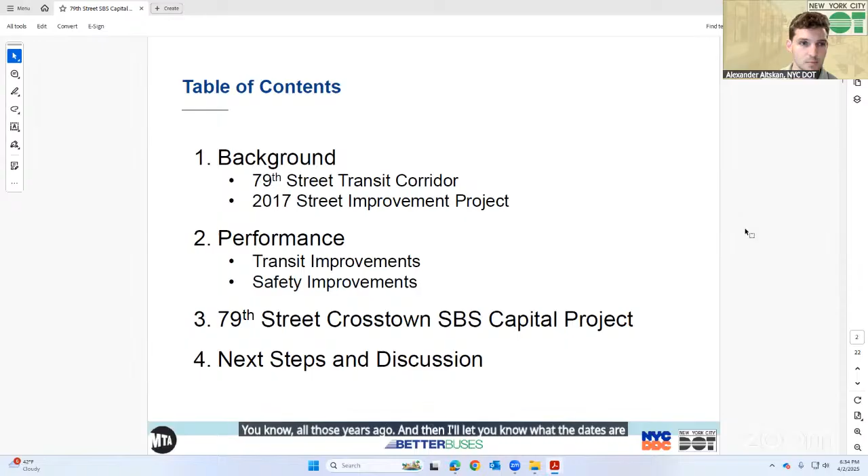So I probably don't need to tell you folks much about 79th Street, but it's a major corridor, a major transit corridor within Upper Manhattan.

As far as I'm concerned, the main thing for me is that it hosts the M79 Select Bus Service route, which is one of the top busiest routes in Manhattan. It has about 13,000 to 14,000 daily riders. Also, because it's a crosstown Manhattan route, it has very high ridership per route mile, among the highest in the city.

And it's also because it's a crosstown route, it connects to 4 subway lines and 16 other bus routes, including the M15 SBS, the busiest SBS route in Manhattan, and functions essentially as an additional subway line.

All of this exists because you have major cultural destinations along the corridor, such as the Metropolitan Museum of Art and Central Park, as well as hundreds of businesses and institutions. And with all of this activity and transit and vehicles, it unfortunately is not the safest of corridors in Manhattan.

In the last 5 years, you've had 26 folks—and again, this is both sides, not just the east side—26 people seriously injured or killed in the last 5 years. We'd like to get that number down to 0.

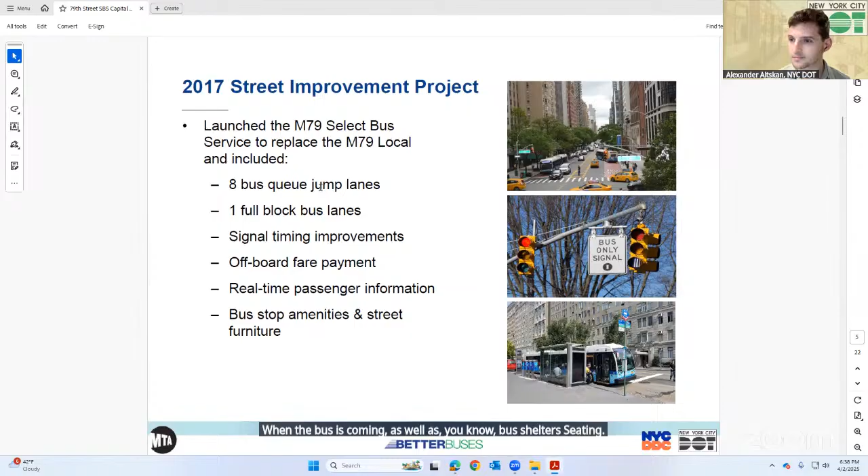After we put all of this in, of course we monitor—well, is it helping? And we saw positive things pretty much across the board. Instances of bus bunching decreased. The dwell times of the buses at these stops decreased significantly, mostly because of this off-board fare collection. We even saw a boost in ridership of the M79 once we were able to put the SBS into service.

It was not only transit that was seeing improvements and benefits—car travel times themselves decreased along the corridor. Bus speeds, which is a big thing we focus on in the transit development unit, increased. And what's probably the most positive, because when the bus is running on schedule, that's when it's reliable and predictable, the number of late buses decreased by 45%.

And all of these changes have more or less remained through the years since this implementation. So if you look at 2024, the bus speeds on the M79 SBS are still faster on average than the average route in Manhattan. The other thing I always like to focus on is on-time performance. We would like to be at 100%, but we're at 81.5%, which is again outperforming the averages we have in Manhattan. So from a transit perspective, the project has been a success.

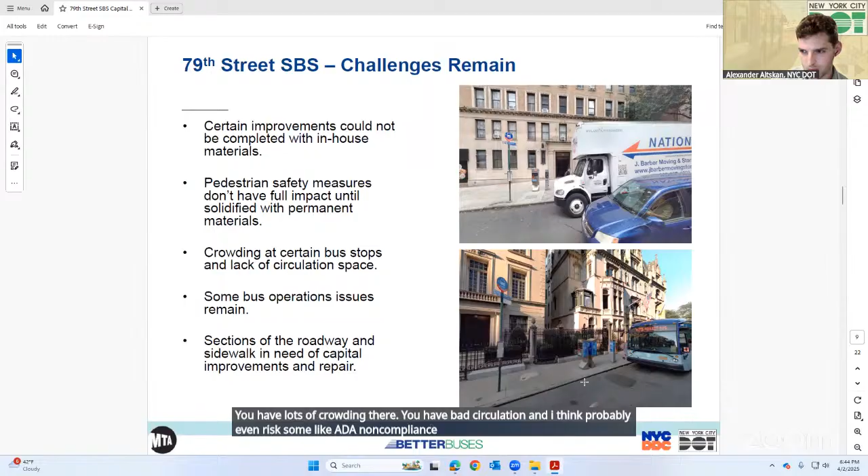And then the photo at the bottom — we'll get to this — this is in your district. This is the eastbound stop at 5th Avenue. You have a super narrow sidewalk, you have lots of crowding there, you have bad circulation, and I think we'll probably even risk some ADA non-compliance created by the pinch point on the other side of the fare machine. So that's those things, and a project like this takes all of these challenges into consideration.

Again, I have to temper things and say that the numbers I'm showing here are the totals for the full project — not all of these things are in your district, give or take about half are. What this capital project is going to be doing — well, first I'll say what we're not going to be doing. We're keeping the same alignment of the bus lanes. I think the way we looked at the numbers, the way they are now is good. We're keeping the same hours, and we're not changing any of the traffic patterns that we implemented back in 2017. So that's staying the same.

But what we are doing is upgrades at pretty much every bus stop.

Give or take a few along the corridor. When I say upgrading bus stops, I mean we're putting in amenities, bringing everything up to standards. We're doing things we couldn't do back in 2017, like installing bus pads pretty much anywhere we're touching. Bus pads are those big rectangular concrete things in the roadway which hold up better over time with heavy bus use.

We're taking all the various medians up and down, left and right along 79th, to upgrade those crossings to be fully ADA compliant, since some of them are outdated and not up to par of where they should be. On top of that, those are things we're fixing, adding, or reconstructing.

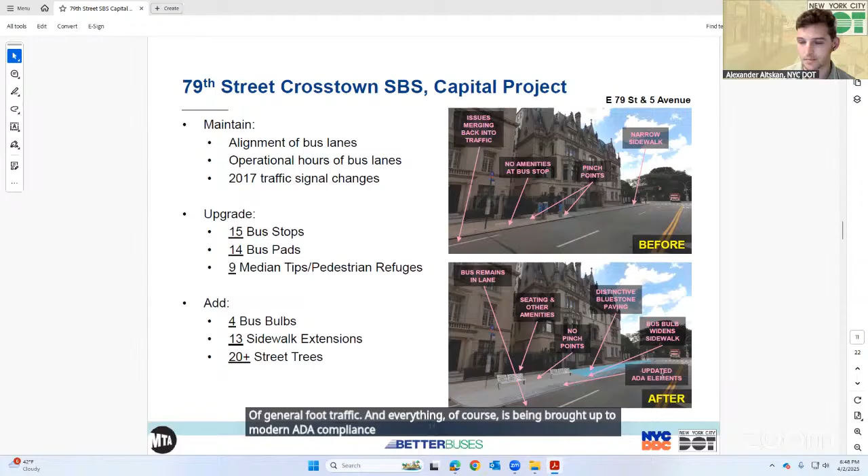The other things here are kind of self-explanatory: the sidewalk is being widened, people waiting on the bus are no longer in the way of general foot traffic, and everything is being brought up to modern ADA compliance, because that's the law and it's just what we need to be doing.

So bear with me, I'm going to take you intersection by intersection to list what we're doing at each one. I won't go into too much detail since I don't want to take up too much of your time, and you'll also have these plans to look at and can email us questions afterward.

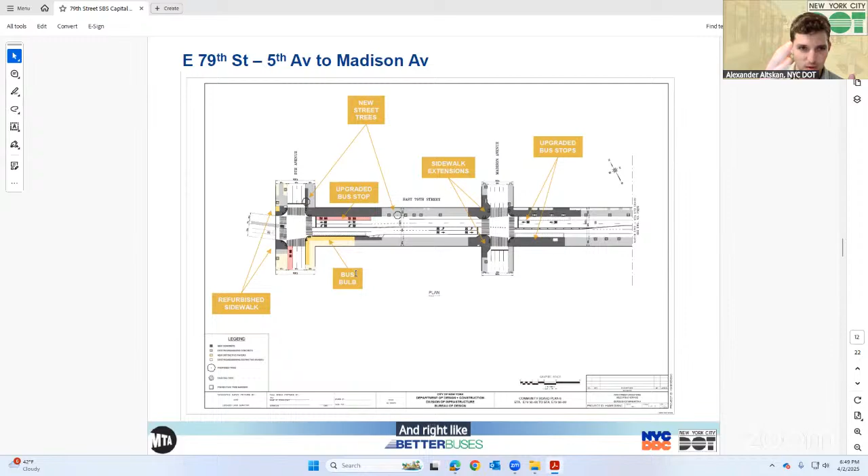Starting at that same intersection I keep talking about, 5th Avenue and 79th: at the bottom here is the bus bulb we're putting in. And like I just went through, a bus bulb isn't just a bus bulb—there are a number of things that come with it.

In addition, we're upgrading the bus stop opposite 79th Street from this one, the westbound stop. It's not getting a bulb—the roadway width and traffic patterns don't allow for that—but we're still working on the bus stop layout, trying to maximize the benefits we can bring. We're updating the ped ramps on the west side, the Central Park side, to make sure they're fully compliant, and putting in new trees wherever we can fit them in.

When we get to Madison Avenue, here you have sidewalk extensions. This shortens the crossing across both Madison Ave and 79th, and also improves the visibility of pedestrians when they're waiting to cross.

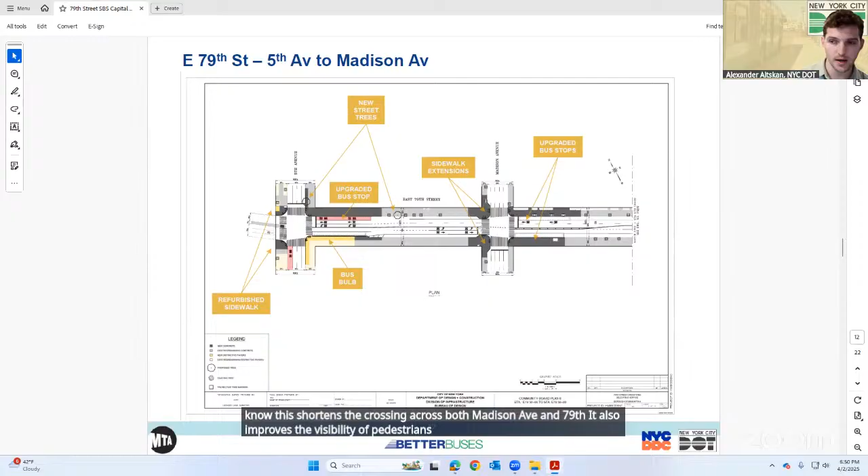And then similarly, there are two bus stops east of Madison Avenue—they are also both getting upgraded.

Moving along, we get to Park Avenue. All the ped ramps at all four corners are being brought up to modern standards. And as I alluded to a while ago, the medians, where things are a bit out of date and the ped refuges aren't in full compliance, are being updated to the latest standards. Street trees are being put in.

Once we get to Lexington, you'll see a recurring pattern. Pretty much every intersection is getting new ped ramps and a new sidewalk at the corners. On the east side of Lexington, we're getting sidewalk extensions, again for ped safety. The westbound bus stop here is also getting refurbishment, as is the eastbound one.

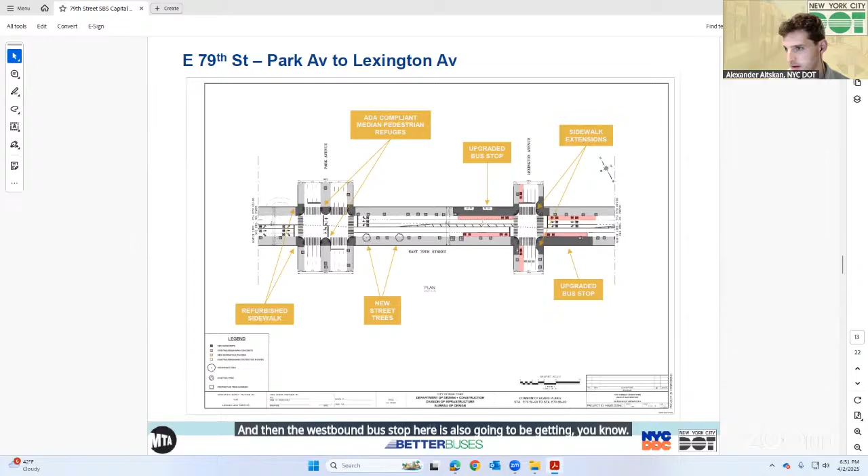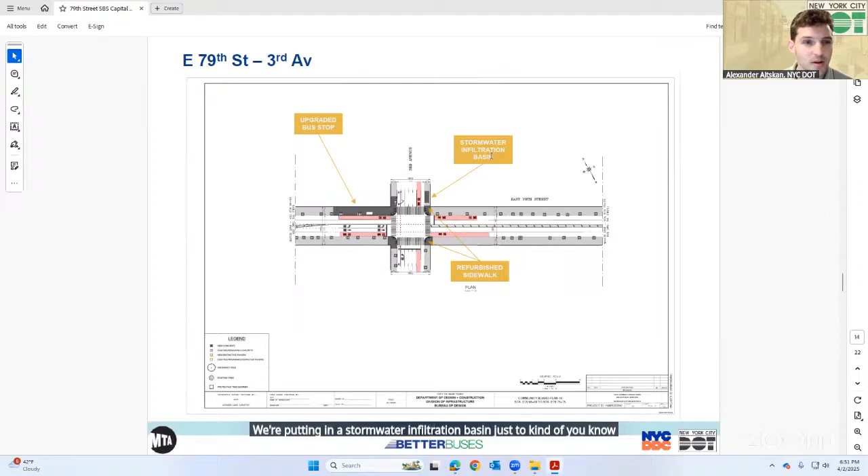Continuing, same thing. By the end of this I'm going to be fairly repetitive. This westbound bus stop is getting upgraded, and we're fixing and updating the ramps at all the corners. Just north of the northeast corner, we're putting in a stormwater infiltration basin, since it's getting wetter and wetter in the world, so whatever green infrastructure we can install to help with stormwater runoff helps. This location was deemed by the engineers as having potential for that.

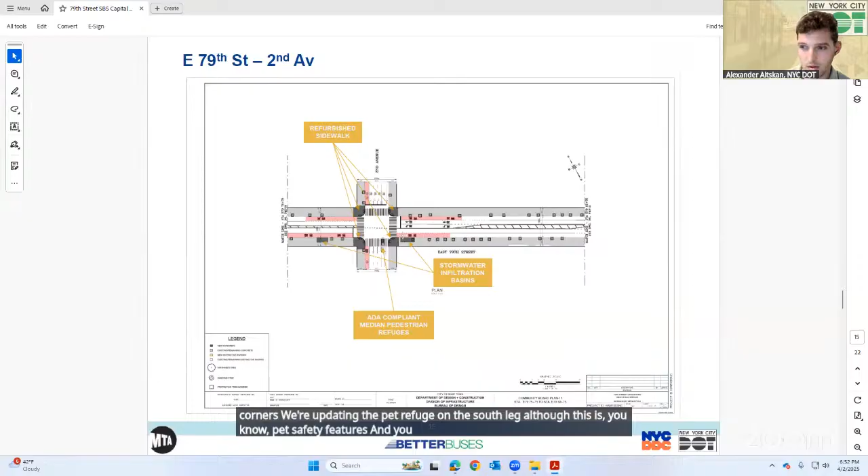Continuing east, once we get to Second Avenue, same thing. We're updating all of the corners and updating the ped refuge on the south leg. All of this is ped safety features. And you have two more stormwater infiltration basins coming in on the south side of 79th.

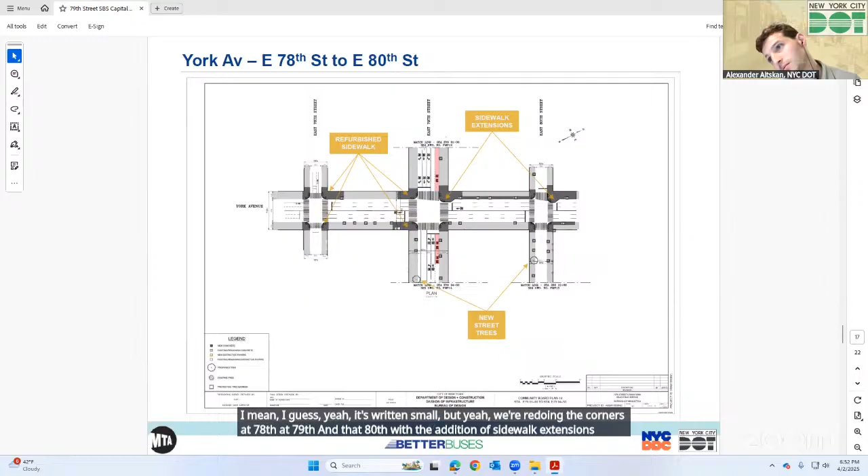York Avenue, we're redoing three intersections along York Avenue. This is where the bus turns around. We're redoing the corners at 78th, at 79th, and at 80th, with the addition of sidewalk extensions on the northwest corners at 79th and 80th. And we're putting in some landscaping. Hopefully I haven't skipped anything.

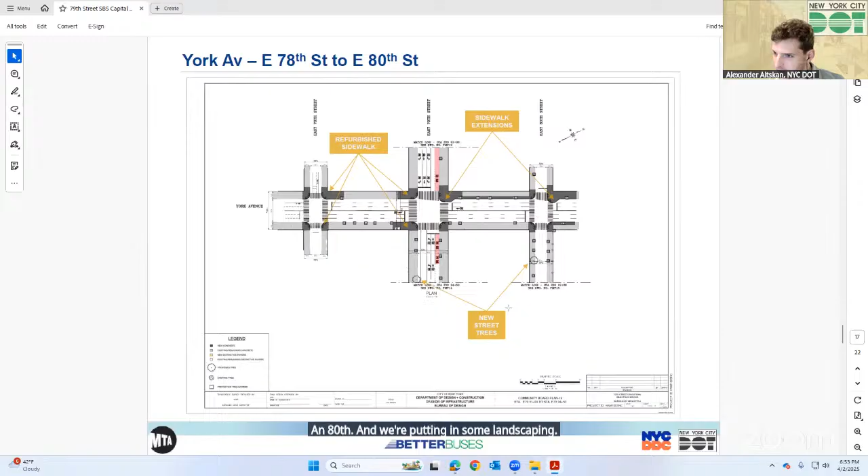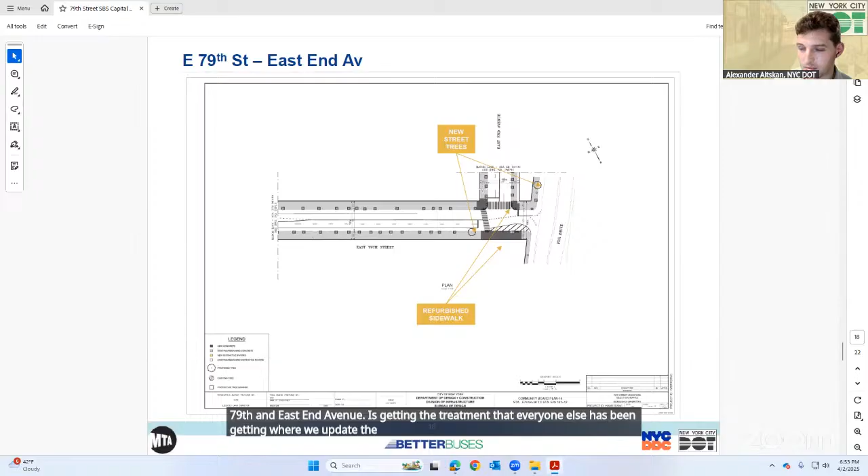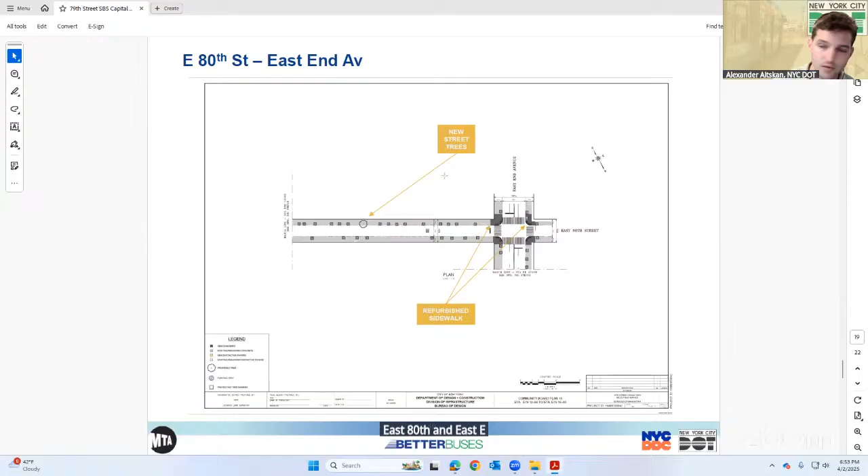That's what's happening there. As we get almost to the river, 79th and East End Avenue is getting the same treatment as everywhere else, where we update the ped ramps and refurbish the sidewalk if it's in need of it. The last intersection I'll show you is East 80th and East End. Same thing, all four ramps are in need of an update, and so that's what we're doing.

We're almost at the question section. Thank you for bearing with me.

In terms of next steps, we're still in design. Right now we're getting into the nitty gritty of the bus stop layouts, which is why we're sharing this with you and with lots of other folks. By the end of this year we're going to be finalizing design, so give or take November 2025 is when the design of this will be complete.

Then there's going to be a lengthy procurement process where this gets bid out, and contractors come back with what this would cost to build. Give or take by June 2026, and honestly probably a bit earlier than that, DDC will be getting in touch with you to let you know construction is imminent. They'll have a community liaison set up and will coordinate whatever impacts there might be as construction happens.

This is a lengthy project. We're doing the whole width of Manhattan, and everything I've just shown you is like the tip of the iceberg—it's everything that's above the surface. All of this work is accompanied by extensive utility work: storm sewer work, water main work, and Verizon, Con Ed, everybody's going to come in and also have things that need to be updated. That's why this takes some time.

So give or take, taking that into account as we do these estimated timelines, the construction phase is about 3 years, and by the fall of 2029 this should be wrapping up. That's an overview of what the project is and what the timing of it is.

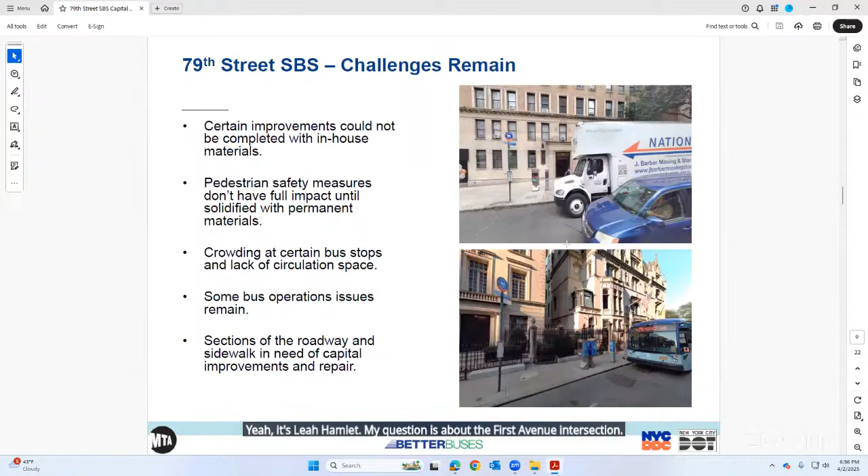It's Leah Hanlon. My question is about the First Avenue intersection. My understanding is that the current arrangement is temporary. The bus stop used to be on the east side, the westbound intersection on the northern side used to be on the northeast corner, but because of the Extell construction there, it's been moved to the northwest corner, which I thought was temporary.

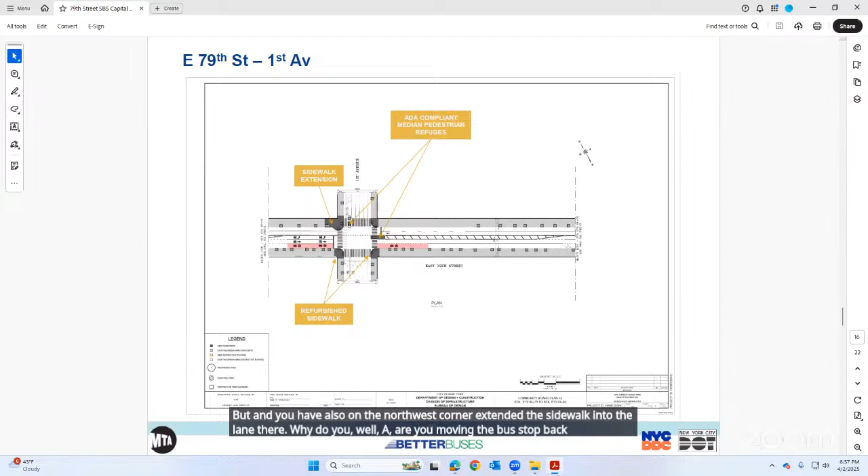I note that unlike the eastbound lanes on the south that have the pink area painted on the road, you don't have that on the north side, which I thought was because of the temporary nature. You've also, on the northwest corner, extended the sidewalk into the lane there. Are you moving the bus stop back to in front of the Extell site, which kind of makes sense? Or, regardless of whether you are, are you going to have those pink bus lanes on the northern side, on the westbound side? And doesn't your sidewalk extension mean the bus can't just go straight through the intersection? It's got to come out into the other lane, where it's doubtless going to sometimes get stuck and mess up traffic. Why don't you just have the pink stripes and have them go straight through, without a sidewalk extension? Because it's a big sidewalk.

Okay, so let's address things one at a time. There are some things I won't be able to answer on the spot, we'll have to look into. As far as the temporary relocation of the bus stop, I'll have to look into that — that's usually because of construction. Unfortunately, on these plans I don't have labeled where the permanent location would be, so I don't want to say whether it's on the west or east side of First Avenue. But in general, if something is relocated for construction, we typically put it back once construction ends.

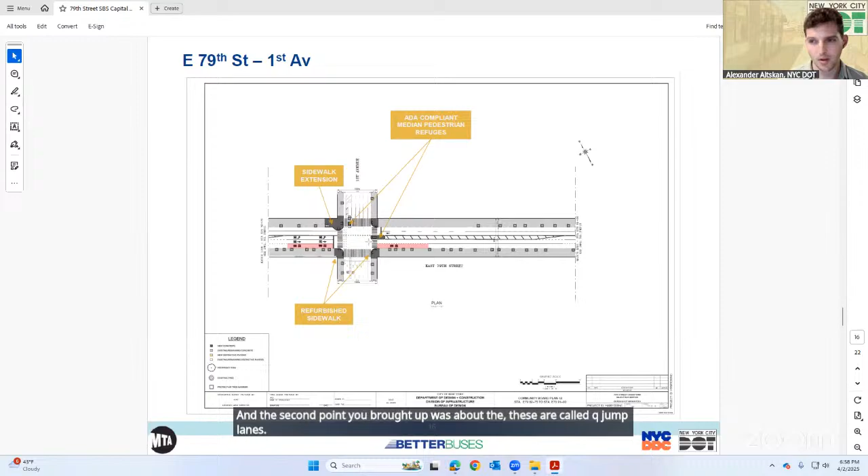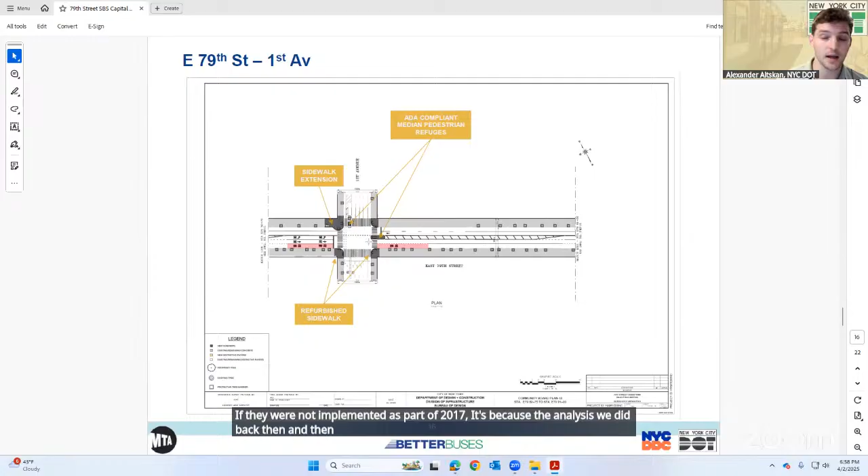The second point you brought up was about these queue jump lanes. If they weren't implemented as part of 2017, it's because the analysis we did back then deemed that at this particular intersection it wasn't necessary. Especially at the beginning of the westbound route, it probably showed congestion and bus delays were not an issue here. So that's why those aren't there. But this is something we can double check, because we are still very much designing this, and if we deem a queue jump lane makes sense here, then we will.

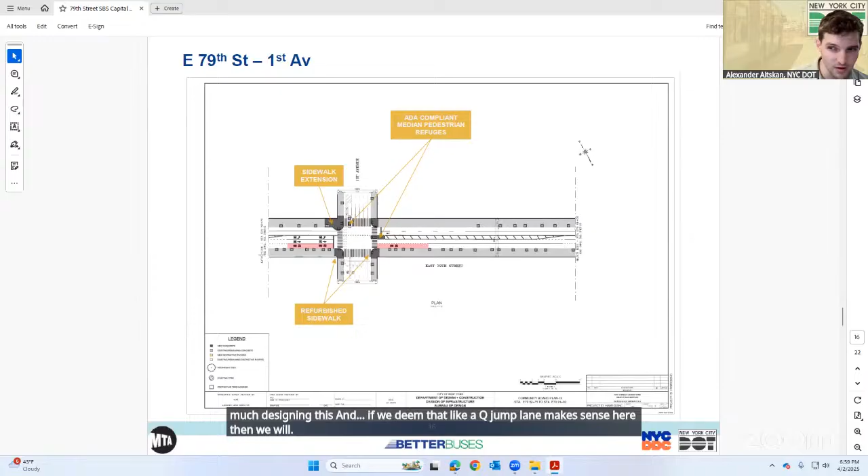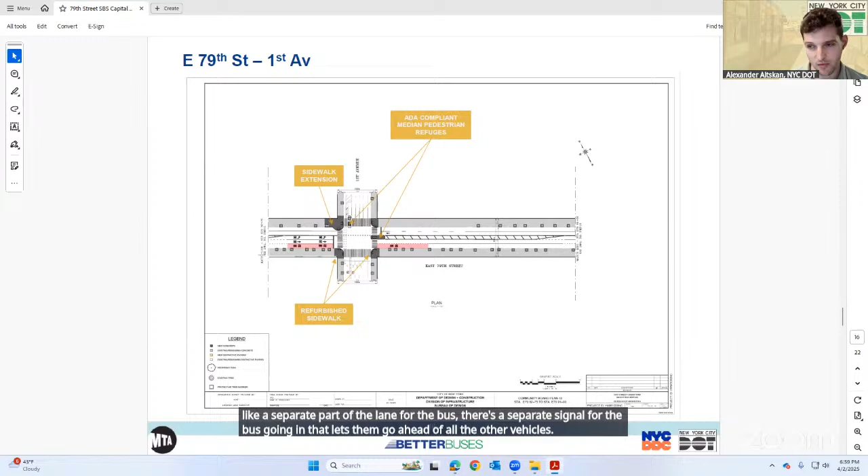The caveat is that there may be what's called a queue jump signal here — not a separate transit priority lane, but a separate signal for the bus that lets it go ahead of all the other vehicles before they get to where they're going. In terms of the sidewalk extension, you bring up a good point. I need to see where the bus stop itself is actually supposed to be, whether it's on the east or west side.

Typically we only put sidewalk extensions into parking lanes. So if this whole area west of here is parking, the bus wouldn't really be going through there anyway, so bumping the sidewalk out and making the crossing shorter wouldn't be much of an issue, since the bus needs to merge anyway. That's something I wish I had time to dig into the site plans and specifics of exactly what's happening, but we haven't noted it.

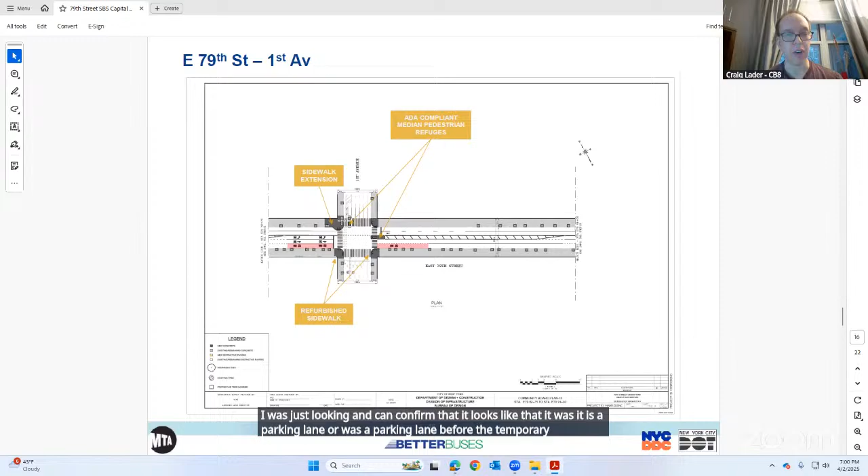We'll double check that for you. I was just looking and can confirm it looks like it is, or was, a parking lane before the temporary relocation on the northwest corner on 79th between First and Second. Thank you very much. So my assumption, even though I don't have it labeled here, is that the bus stop is going back to the northeast side of this.

Does that answer your questions? She lowered her hand, so I think so. Okay, thank you, good points though. Who is next?

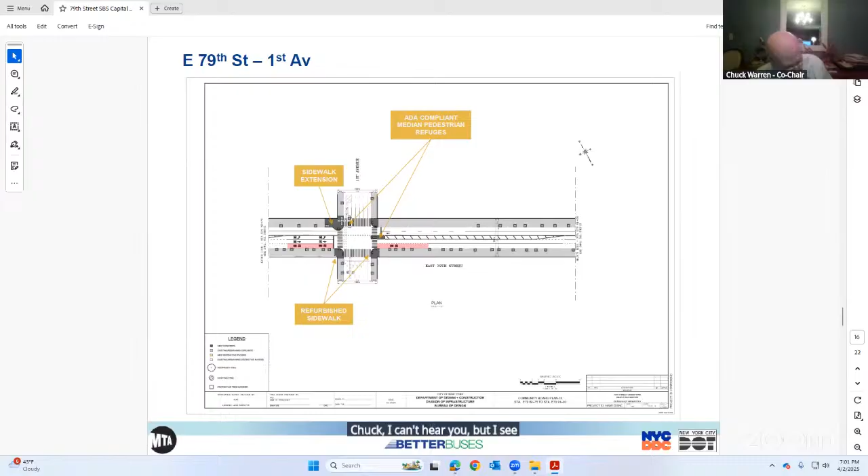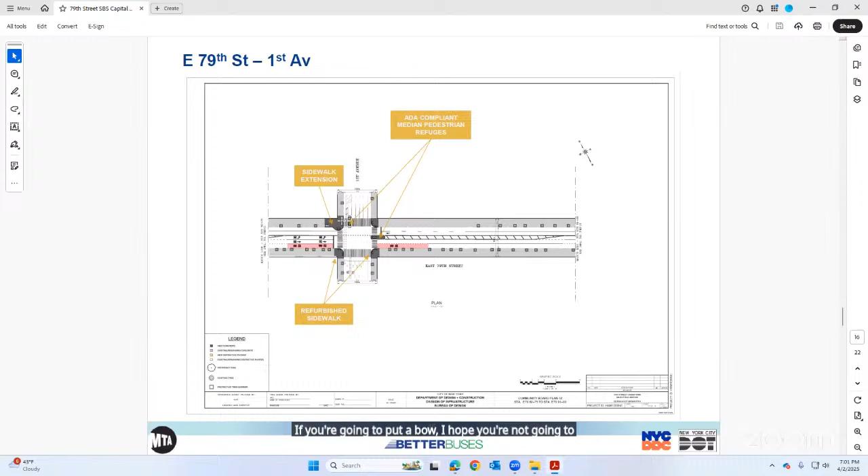First and 79th. If you're going to move the stop, I hope you're not going to move it back to the east side. It's perfectly well connected on the west side, so leave it there.

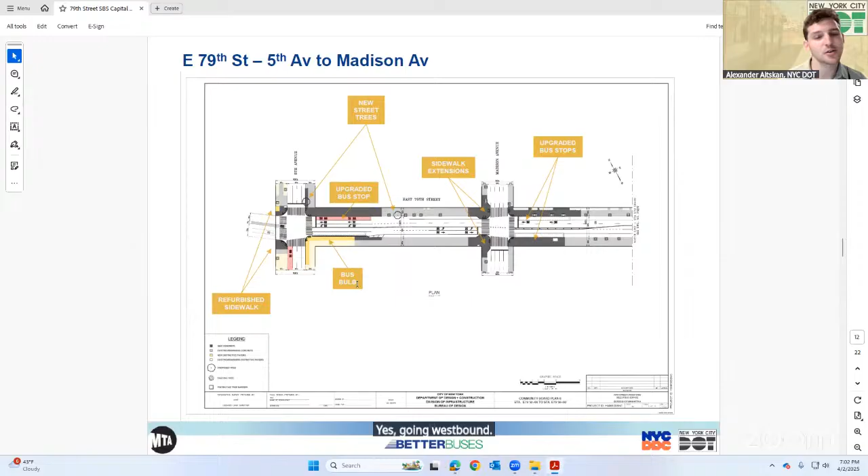79th and 5th, you have a special light for the bus to go before all the other traffic. Yes, going westbound. Why don't you do that on every intersection? Because there are other users of the roadway. Well, that we have to keep in mind.

Okay, 3rd Avenue, if I'm crossing the street, why can't the bus go, well, on the west side, it's already on the west side, but any place that the stop is on the east side of the street, you're not going to get pedestrians crossing across the bus lane, going across the bus. Yes, but, sorry, you can continue with your question and then I'll answer. No, you can answer that one now.

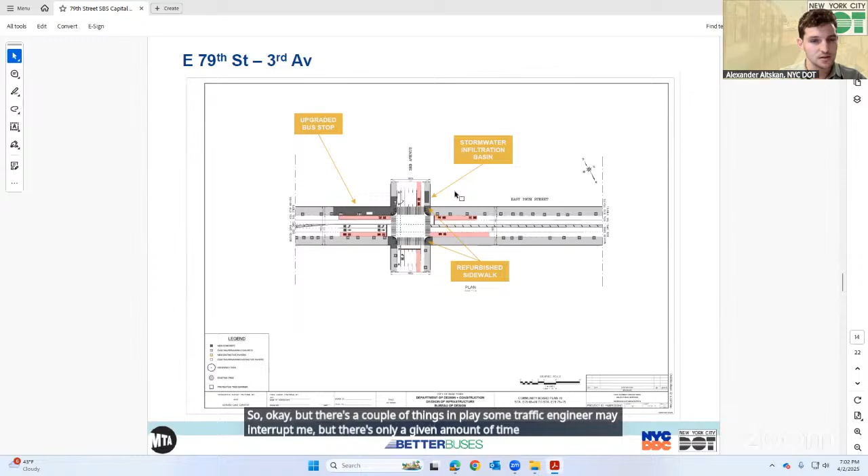So, okay, but there's a couple of things in play, and some traffic engineer may interrupt me, but there's only a given amount of time that we can dedicate to the movements at an intersection. And if you start eliminating, whatever, 5, 10, 15 seconds from all the other directions for this bus, those are now 10, 15 seconds that all the other folks using this intersection don't have. And so you start to get buildup and congestion and long queuing.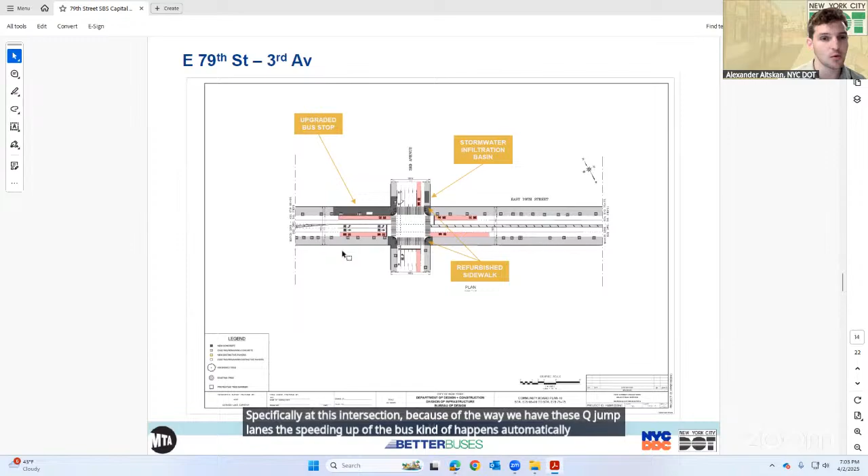Specifically at this intersection, because of the way we have these queue jump lanes, the speeding up of the bus kind of happens automatically because there is already no one competing with the bus in its lane, and it just needs to get across to its bus stop on the far side of the intersection. So it kind of gets all the benefits that a priority signal would give it without actually needing the priority signal.

But on any intersection, you have the walk sign many seconds before the traffic green, correct? Yes, well, on many, yeah, leading pedestrian. So why can't the bus go at the same time as the pedestrians? You're not gonna get anything crossing the street in front of the bus. The bus goes the same direction as the pedestrian, which you have on 5th Avenue and 79th. Anyway, yeah, it's something to consider.

Luckily, we can put these signals in-house. We don't have to do it as part of the capital project. So we'll have flexibility. But I will give this another look.

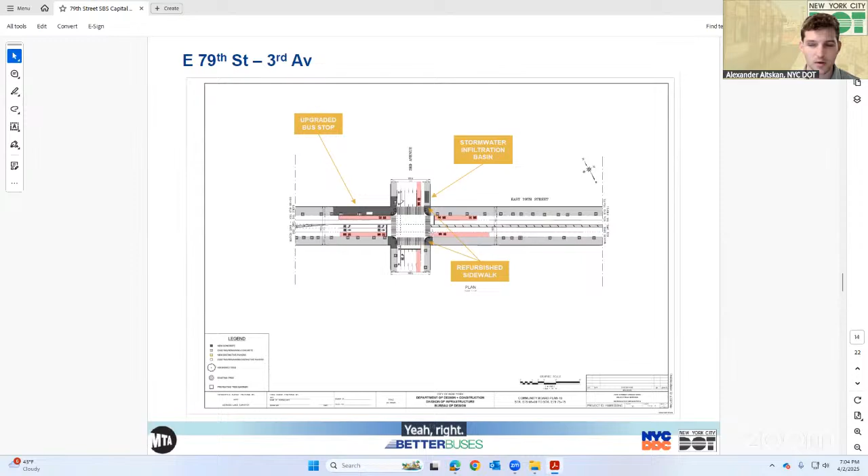Thank you. My other complaint, it's not about the planning or anything, but why don't the buses pull up at the curb? Why do they stop about 3 or 4 feet away from the curb? Well, that's not your problem, that's the MTA problem, that's an MTA issue.

A lot of it is caused because the buses are already delayed. They're dealing with other stress factors on the road, and so for them, they're doing some unfortunate math in their head where it's not worth it for them to pull in fully to the curb. Typically, but if they see someone that needs curb-like access, like someone in a wheelchair, I think they do pull up. But in a lot of situations, yeah, I mean, they're just trying to save time and get to the end of the route on time.

So that's okay, yeah, that's like a human answer. You know, I don't know what MTA's official answer is. Thank you.

You can put it down that the stop stays on the west side of First Avenue, please. Yes, well, again, I can't make you any promises, but we're gonna look at it carefully to see where it works best and what the pros and cons are. But it's definitely something we're gonna consider.

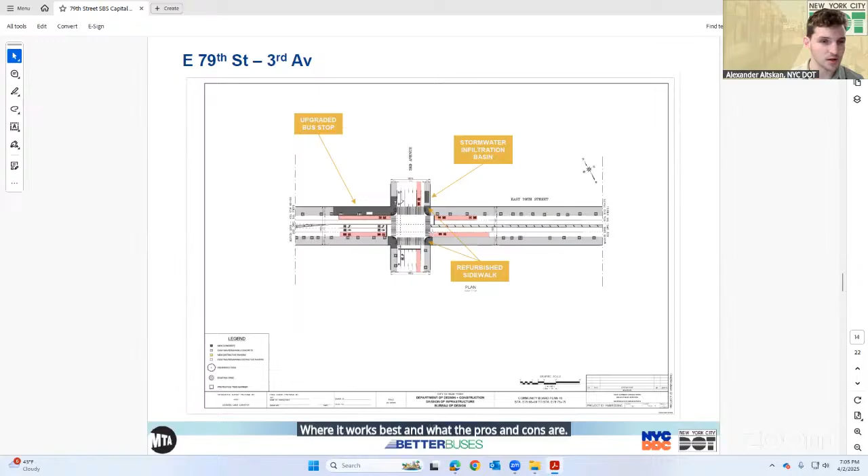Thank you. And when are you going to be removing all the MetroCard machines? That is a question for MTA, and it's coming. Okay, thank you. That's all, Chuck. Thanks.

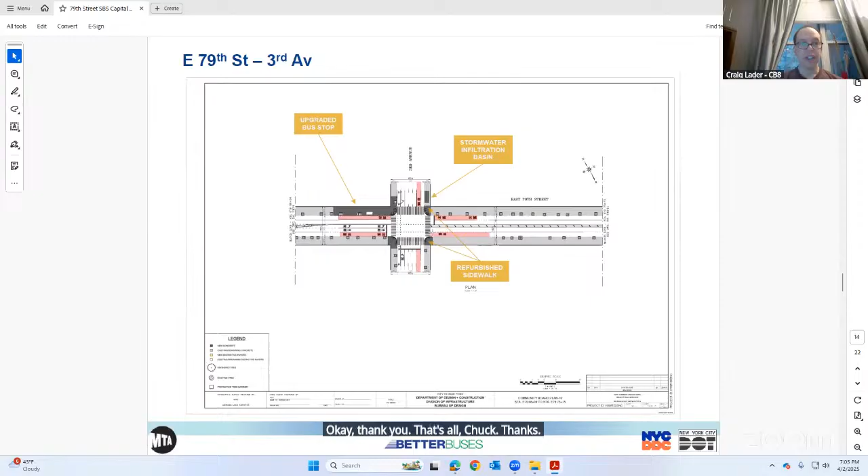Here. What do you say, Craig?

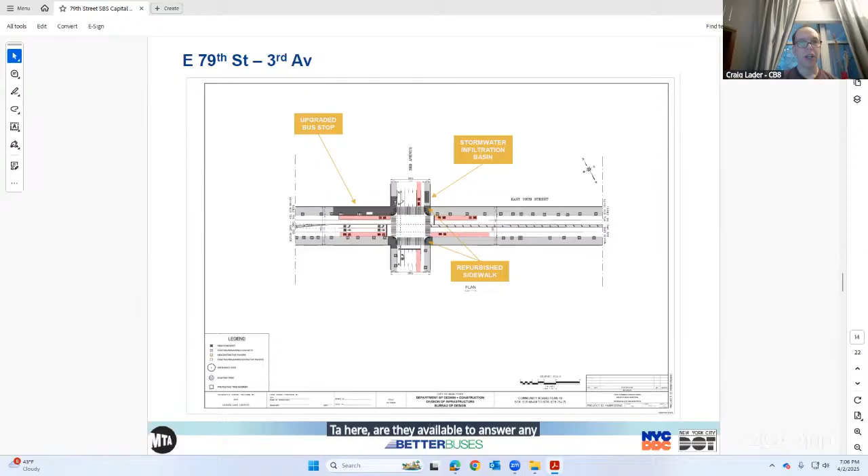TA here, are they available to answer any questions that may relate to areas under their jurisdiction? Yeah, this is Rob Thompson, MTA Bus Planning. Regarding those MetroCard machines for the SBS, they will be removed when the MetroCard is retired, which I believe we've said is sometime next year. No specific dates yet.

In terms of buses not stopping next to the curb like shown in this picture, the picture is showing where they should be. We tell drivers to pull up to the curb, but sometimes for whatever reason they don't. If there's a vehicle double parked ahead of them, they might stop somewhat off the curb to get around it. But if you see a bus driver egregiously stopping far out, please write down the bus number on the side, front, or back of the bus and send it in to us, and we'll contact that driver to make sure they know to pull all the way to the curb.

Rob, this is Chuck Warren. I want to say to you that the MetroCard for people who have half fare senior cards is done, finished, because I had one and it went out. I tried to use it on March 25th or after that, and it's gone. I now have an OMNY card that I'm using, so it's not going on to next year.

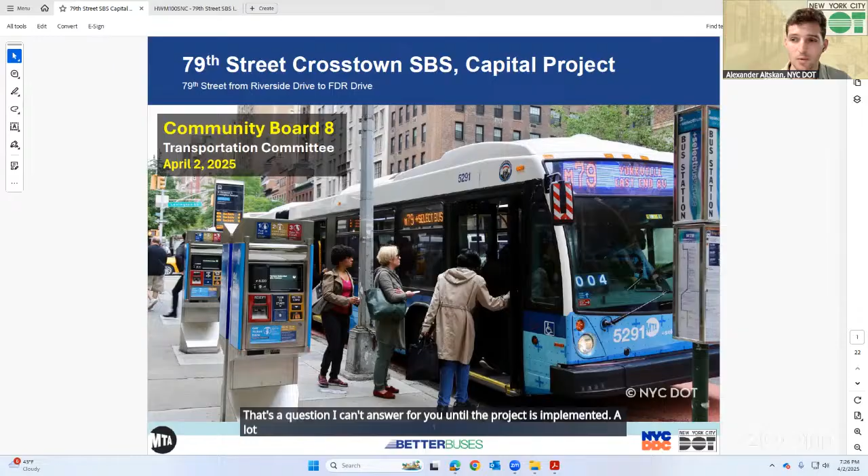That's a question I can't answer for you until the project is implemented. A lot of this is also building out what we've deemed to be a successful in-house implementation. And then in terms of improvements...

I mean, this says in 2024, after you've already spent the money on the project, we're looking at 0.9 miles per hour faster. What is that? I hate to admit to you the state of transit and the difficulties we come up against, but running a whole mile faster compounds over time—it is significant. I get it, I know you're only the messenger here, but people are running the marathon faster.

No, I'm not saying they're paid $45 million to do it with 0.9 of an mile per hour faster. That seems like not really good. I mean, who's measuring the quote unquote success of the program?

We are, and MTA is. What I'm showing you here is a slide with the big picture because this is a 1 hour presentation. If you want to get into the specific numbers, that's available to the public online. I honestly think that's a very important part of the conversation. You're telling us this is going to take almost 4 years to put together.

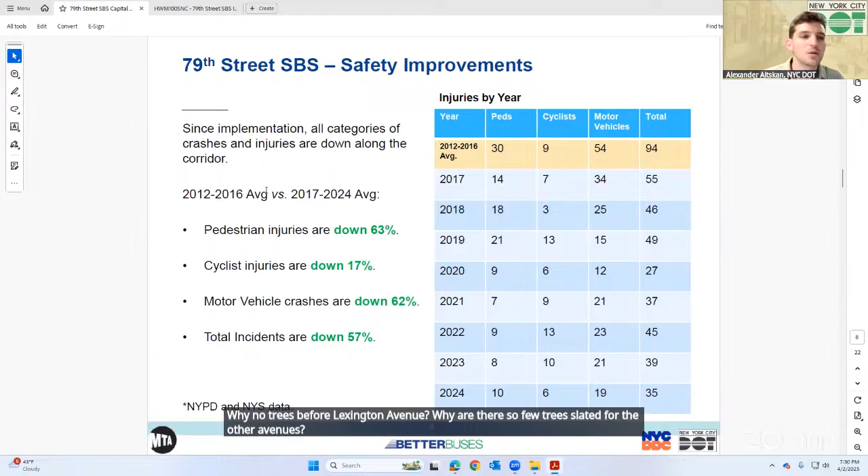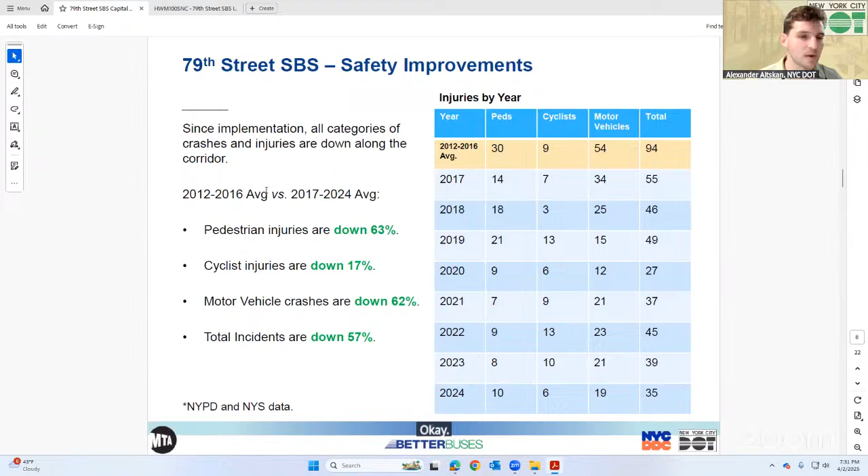We're still working on the landscaping design. What you were shown is very preliminary. There's a landscape consultant working with DDC to identify good locations for these trees. They're not here at the moment, so unfortunately we can't give you a detailed answer, but trust us that we're trying to maximize trees - that's like the cheapest, best thing to put in.

I would tell you that from what we've heard from the community, we don't want benches. You can't say that - the community has never passed a resolution saying we don't want benches. I didn't say that, I said we've heard from the community. Please don't interrupt me, Craig.

Thank you. The other thing I want to say - I've seen this now being put in the subways, these lean bars, especially in narrow sidewalks. It would be much preferred and easier for sanitation cleanup to have those lean bars rather than seating. We're putting in a lot of those, yeah, especially in places where it's constrained. So since that's already something the MTA is looking at, I think it would be much preferred than seating, especially as you've already agreed these are narrow sidewalks.

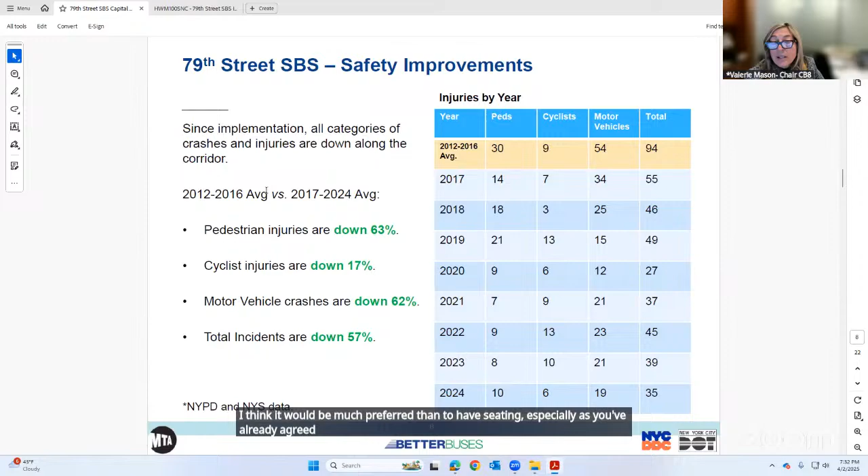And I appreciate you taking my comments, and I'll move on to somebody else. Thank you. Thank you, okay.

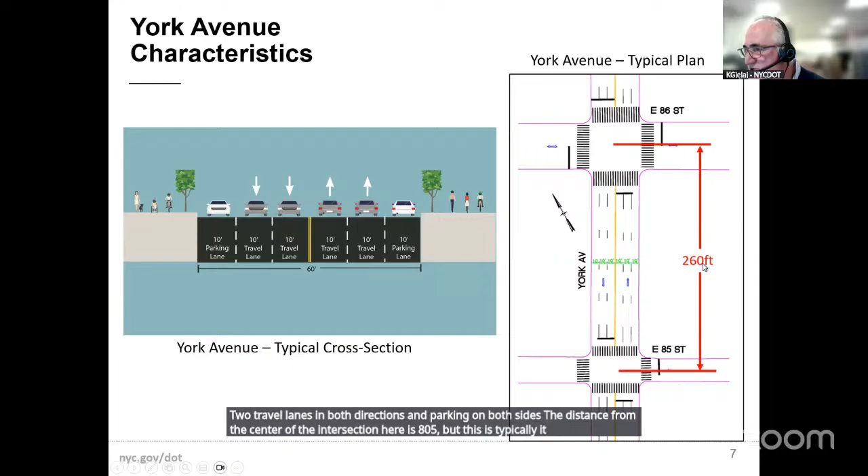This is just some basic characteristics of York Avenue, this is a cross section. We basically have 60 feet to work with, 2 travel lanes in both directions and parking on both sides. The distance from the center of the intersection here is 85, but typically it's about 250 to 260 feet. So this is what we have.

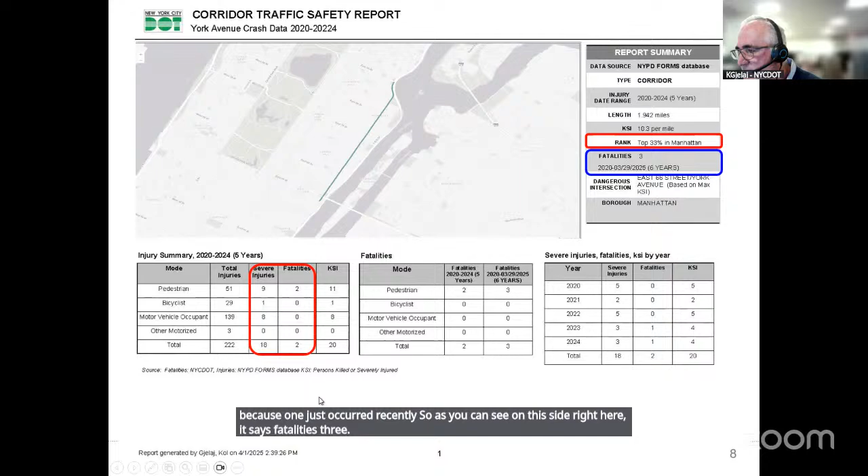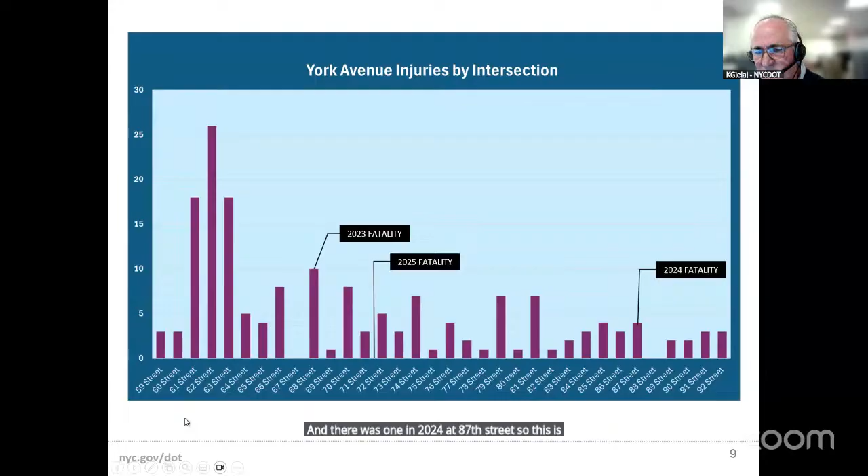In 2023, there was a fatality at 68th Street. The recent one was between 71st and 72nd in the mid-block, and there was one in 2024 at 87th Street. So these are 3 fatalities in the last 5 years that happened there.

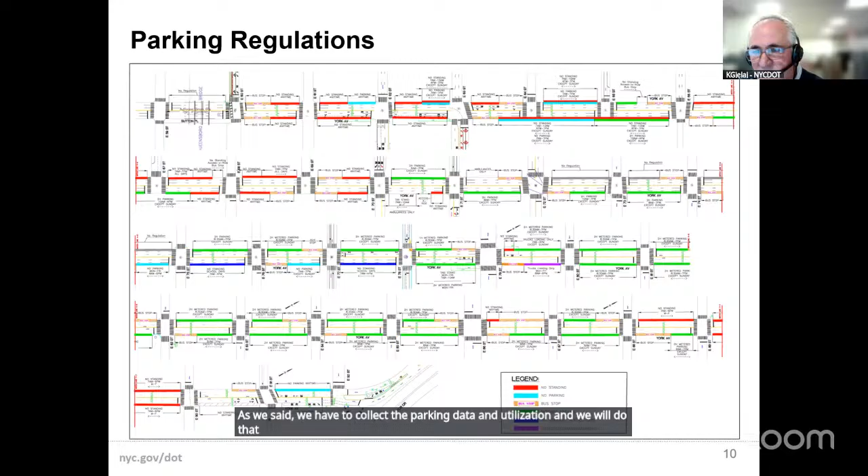I'm not sure if I can show this, but this is the best way of communicating with us. First, you can do it directly or with the Borough Commissioner's office - Rafael is the point person. So if you want to contact, ask, or suggest something, you can do it that way, or we will soon have a specific project site on our DOT website where you can insert directly.

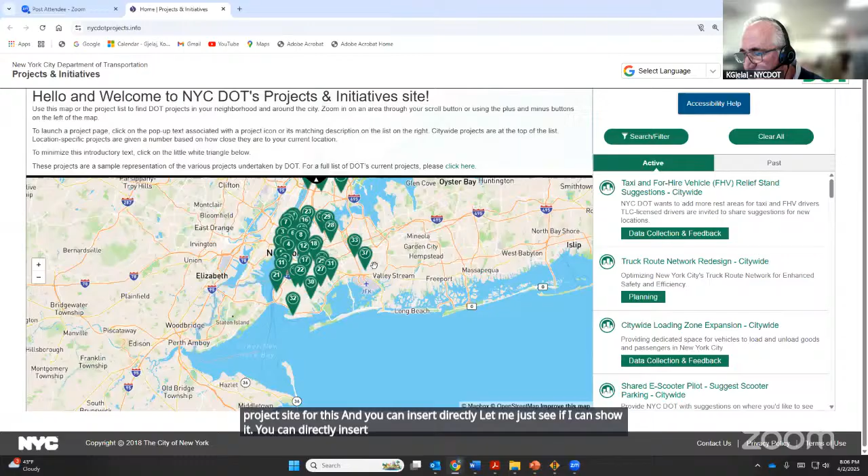Let me just see if I can show it. You can directly insert - we still haven't set it up, but I'm going to use one of these other projects as a sample. This is the fastest and best way to communicate with us, because we will check this website weekly or maybe even daily.

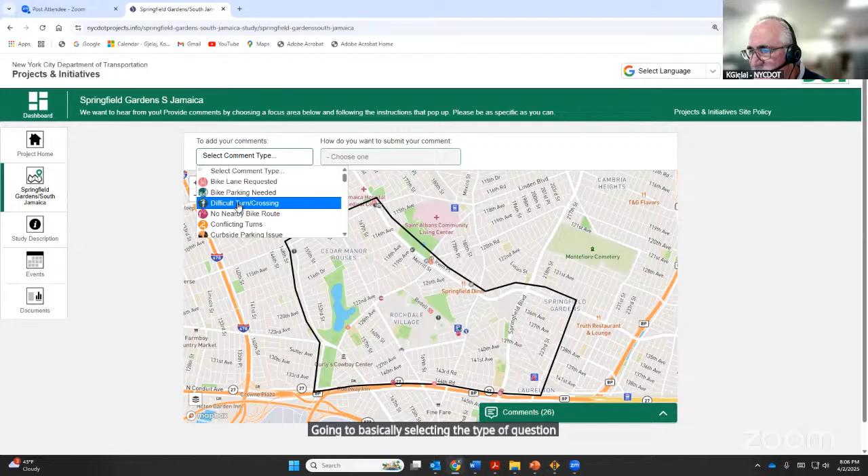It's pretty simple. You basically select the type of question or suggestion that you have, and let's say you choose on the map, bring this to the location you want, and insert the comment with whatever you want to say. This worked really well.

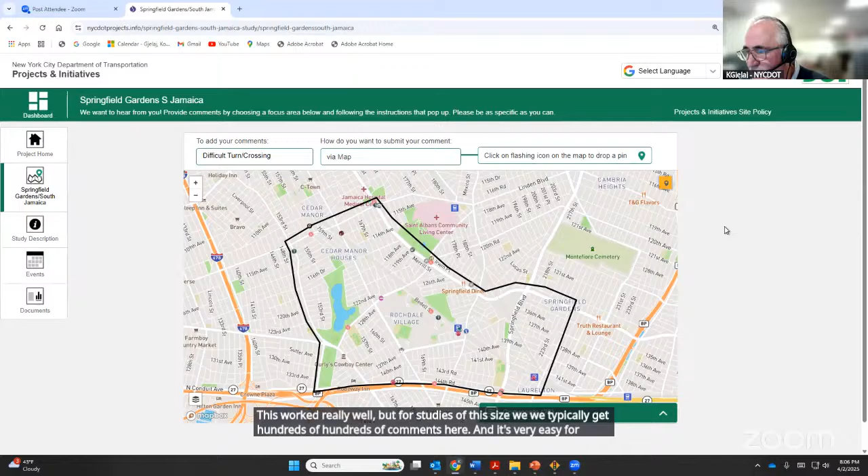But for studies of this size, we typically get hundreds of comments here, and it's very easy to do this on your side, and it's very, very convenient for us to review it.

Basically, this is what we have to show for now. As we said, once we collect the data, we will be in touch. I can imagine there's going to be a lot of interest, because this is a long corridor, and I'm sure there are a lot of issues there.

Thank you, appreciate it. We're just starting, obviously, in the beginning, and we'll look forward to hearing back from you when you're ready.

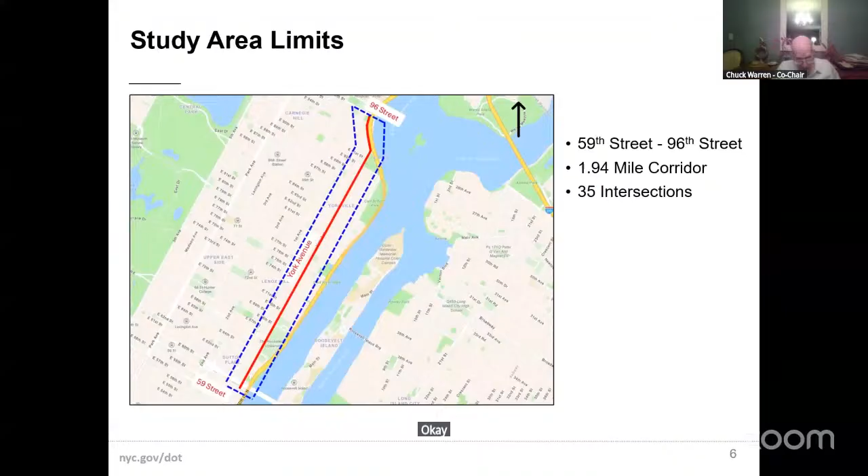I just don't know why I spent the last 15 minutes listening to a presentation on something that the DOT is going to study. The community board is meant to be about the community and soliciting community input, and to have the topic of the day essentially pushed to number 5, buried. I've been on my couch for over an hour and a half with my earbuds in, ignoring my family, taking away from family time to participate in the community conversation. I really wish we could do this a little bit more efficiently.

I have comments on category number 5. I'd love to present them right now if you'd allow me to. No, you're not allowed to do it. Listen, in this case, I just want to say we appreciate your thoughts. We should do this in a much more efficient manner. Thank you, Andrew. We'll take it under advisement.

Thank you. Okay, next, Devin Friedrich. Hi, thank you, Chuck. Thank you to the DOT for doing the study during this presentation. I live on the east side of York in the upper 80s by Carl Schurz Park. I'm 24 years old and I've been here for 21 years, so I've seen through all phases of my life York Avenue.

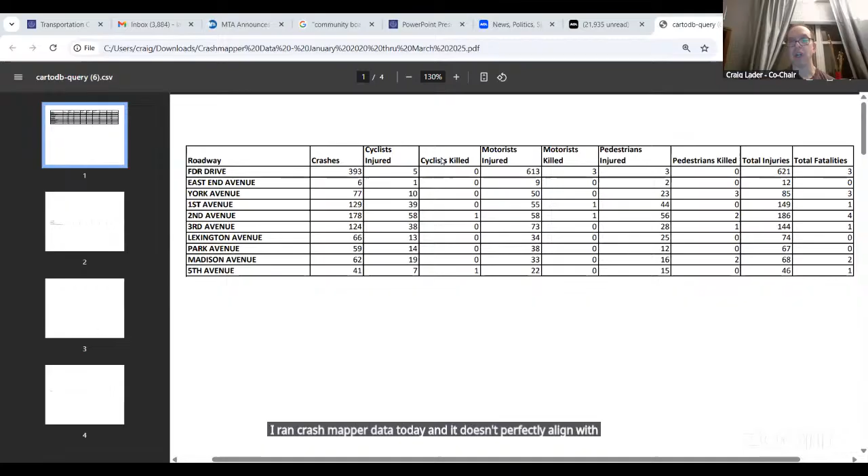I ran Crash Mapper data today, and it doesn't perfectly align with Cole's data because I did it starting in 2020 through March 2025. But it correlates in terms of the pedestrians killed. Rita was asking about the cyclist injuries - it's actually relatively low compared to other corridors, even compared to the other more narrow avenues. But the pedestrians killed, York Avenue is highest, and it has a higher injury rate than the other narrow avenues. So I think clearly there are issues here.

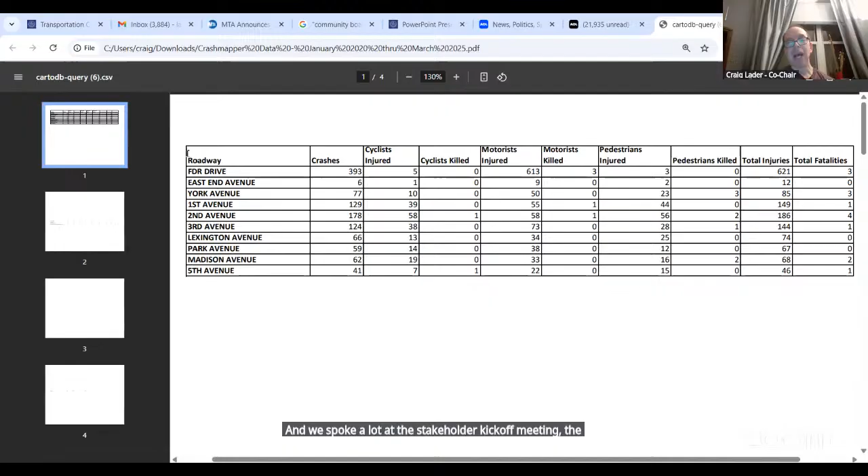But what I wanted to point out was this line here, the FDR Drive. We spoke a lot at the stakeholder kickoff meeting, the technical meeting, about the relationship between the FDR Drive and York Avenue. Basically, whatever happens on the FDR Drive has spillover effects on York Avenue. A lot of the issues that appear on York Avenue are directly related to the entrances and exits. We see, especially by 71st and 73rd Streets - 73rd Street is particularly problematic - a really high incidence of crashes and injuries because of the blind turn that vehicles have to make as they're making the right turn onto the entrance ramp, as cars are speeding off at the exit ramp from the FDR Drive.

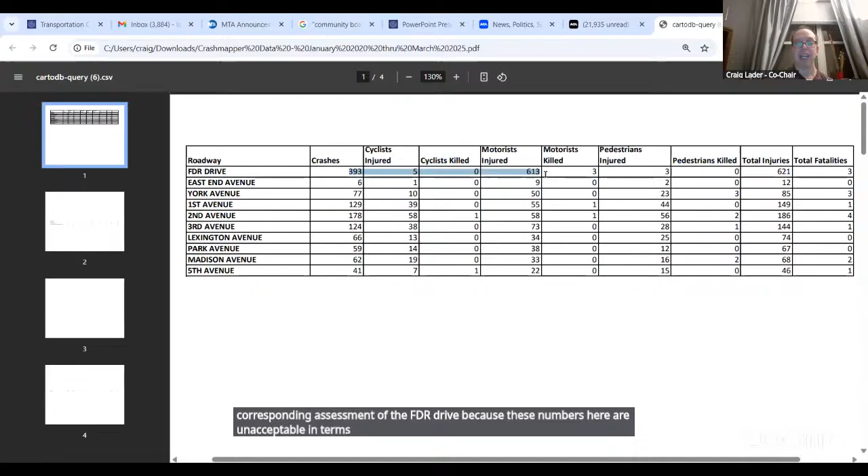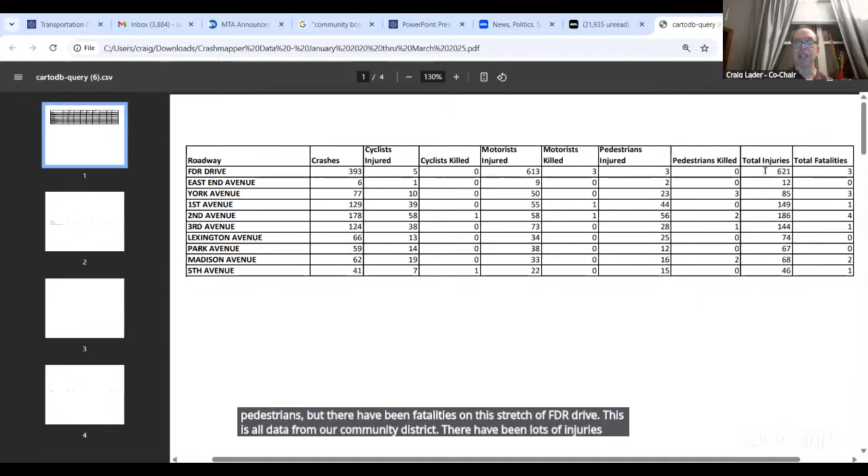I think one of the things I was hoping we could do as part of this is - the FDR Drive is not fully under the jurisdiction of New York City DOT, and we're trying to get clarity as to what parts of it are versus what parts of it aren't. But largely, New York State DOT is the operator of the FDR Drive. What would really be helpful for us to look at the York Avenue aspect is to have a mutual understanding of the FDR Drive. I want to bring up the possibility that we ask New York State DOT and New York City DOT to come together and do a corresponding assessment of the FDR Drive, because these numbers are unacceptable in terms of the number of crashes and injuries - mostly motorists because there aren't really pedestrians, but there have been fatalities on this stretch of FDR Drive. This is all data from our community district. There have been lots of injuries, and clearly those crashes impact traffic operations on York Avenue.

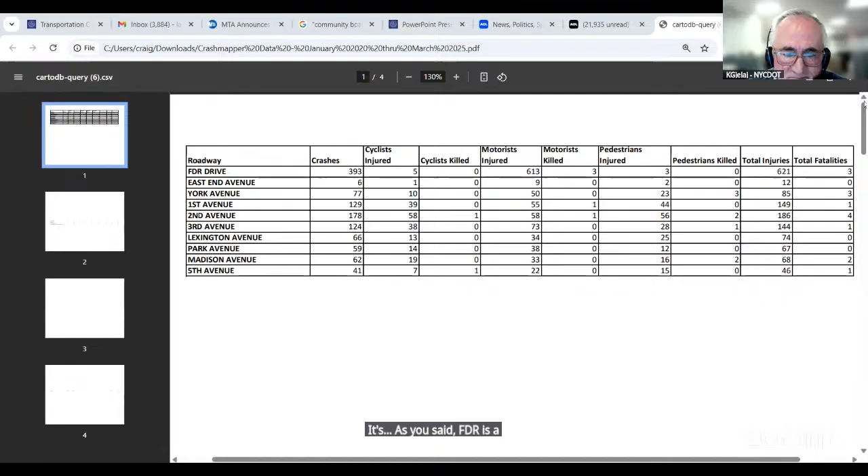So can the DOT folks comment on that? As you said, FDR is a state roadway. We will definitely look at 72nd and 73rd Street issues.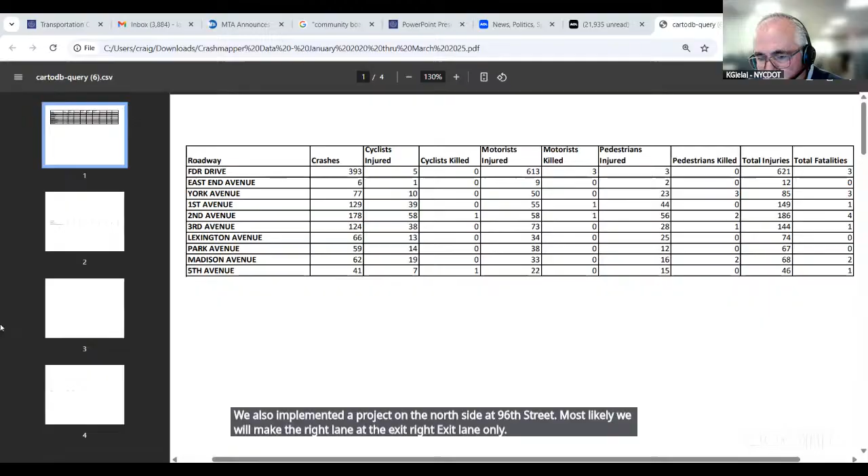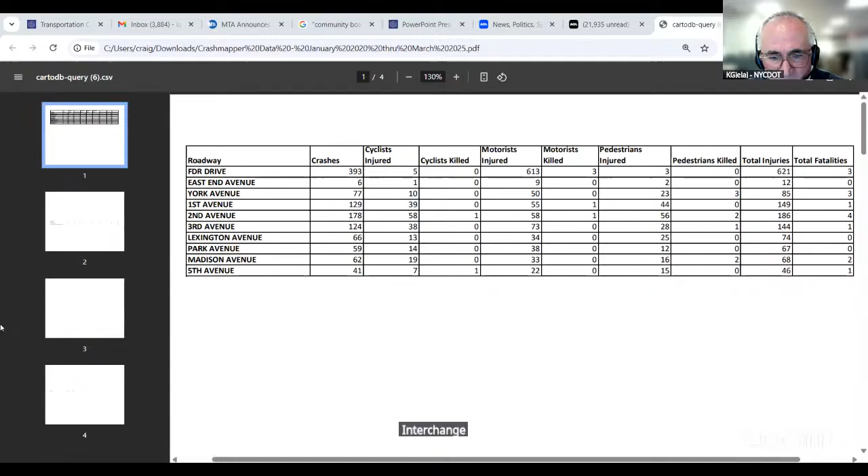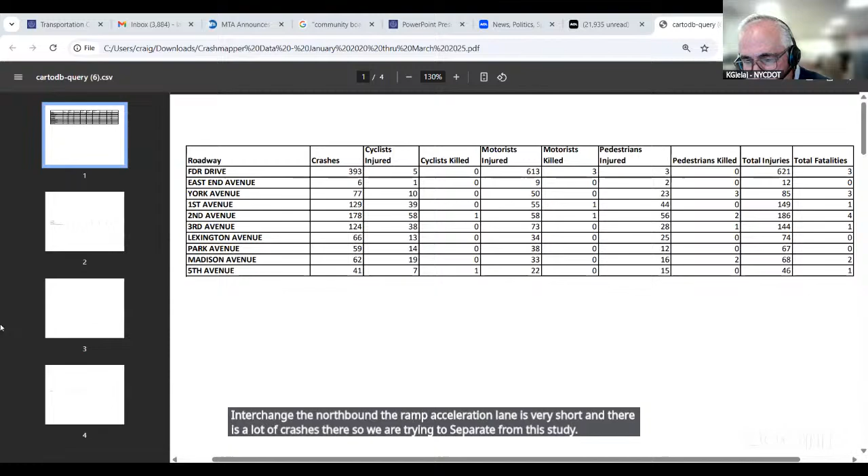We're also implementing a project on the north side at 96th Street. Most likely we'll make the right lane at the exit an exit-lane-only, because of the incidents happening there. At the 96th Street interchange, the northbound ramp acceleration lane is very short, and there are a lot of crashes there, so we're trying to separate it from this study.

This is a street improvement study we're looking into right now. But to be honest, I don't think we can include State DOT or the FDR in this study, because there are limits in budgets. Once we submit our request for funding, we have to be very accurate about what we're studying, the study area limits, and how many intersections we're studying. Once we start expanding it, we're out of project scope.

Excuse me, Cole, I appreciate what you're saying, but I think I was misunderstood. I was suggesting our committee ask for a separate but corresponding study, not to include it in the scope of this one. We understand this project has been defined and funded for its current scope. I'm talking about asking for a corresponding, separate assessment that would mostly be done by New York State DOT, since they control the FDR Drive, but that would really inform what we're doing here as part of this effort. That was my suggestion, thank you.

That's good that it's clarified. We work with them - we worked with State DOT on the BQE and a couple of projects with similar issues around exit and on/off ramps, so we're here to work with them also. I just wanted to make sure I was understanding correctly when I saw one of the bullets for tonight's discussion - I misunderstood and thought maybe we were being asked to go into the FDR. Okay, thank you for clarifying.

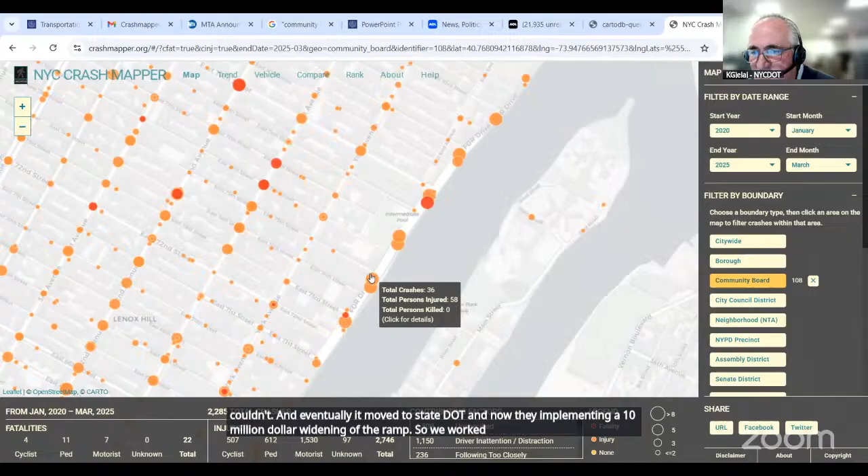Who's going to make the recommendation on how to fix the exits and entrances off the FDR drive? Is that a DOT issue, or is that you working in conjunction with the state on the FDR drive? Well, we typically work with state DOT. I can tell you one case we just had recently in Brooklyn for Exit 31, that we tried to solve for the community for like 4 or 5 years and we couldn't. Eventually it moved to state DOT, and now they've implemented a $10 million widening of the ramp. So we worked with them, gave them our study, and on our suggestion they reacted and actually implemented the project. This is how we work with them.

See, here's the problem: we've been waiting over 10 years for your study. I don't want to wait another 3 years and then have to go back to the state to do a study, to fix a problem that is happening every day and is actually causing loss of life and horrible injuries. So you tell us, what's the best way to do it?

You can see, I'm just highlighting again, this matches up with my data, January 2020 through March 2025. Here's 79th Street and some of the crash and injury numbers. This is by the end of that ramp. Then as you approach the exit at 74th Street, 73rd Street, these are very high numbers here. You can just see what a problem we have. They're most pronounced at all the entrances and exits.

Well, how about this? How about I make a motion to table my own motion until the DOT gets back to us and tells us whether that study is going to be enough to persuade the people who run the FDR drive that they need to fix whatever needs to be fixed? This is a current and real problem right now, and in some ways you don't even really need a study.